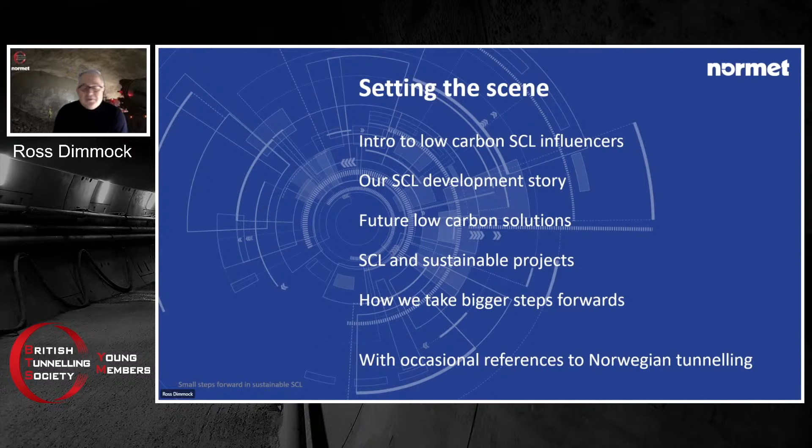So, what would be a presentation without the word COVID in it? I'm sure if you're anything like me, you're pretty sick and tired of these little plastic strips and sticking things up your nose and down your throat and squirting bits of fluid into tubes. It has been quite horrendous, I'd imagine, for everybody.

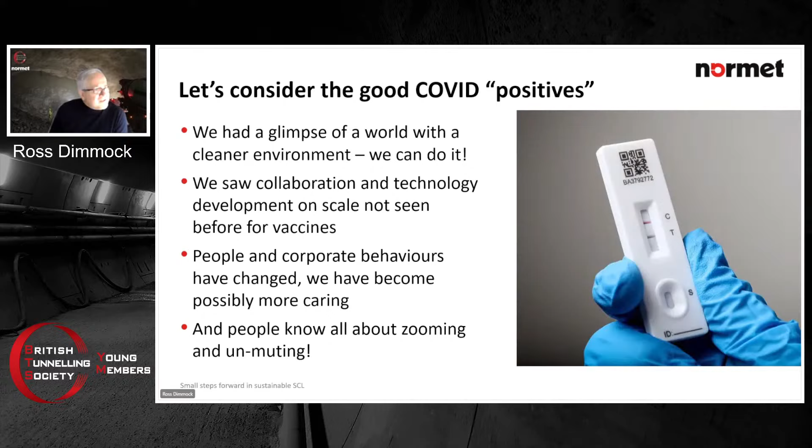But there are some good COVID positives, as I call them. During that lockdown, I think we had a glimpse of an environment that we found quite pleasing - very low traffic, very clear skies, and satellite images on the news of northern Italy looking smog-free, and in India. I think it was quite an eye-opener how quickly we felt the climate could get back to normal, or back to some kind of clean regime.

The other thing I think was interesting was the amount of collaboration and the human behaviors in collaboration to actually achieve a goal, on a massive scale, a real challenge to the industry, in the medical industry, to produce vaccines. It shows that things can really work globally and collaboratively on real issues.

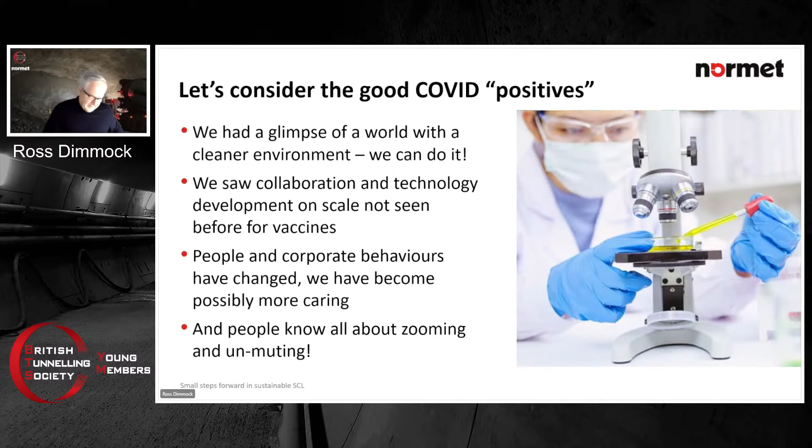I think the other thing was that our own corporate and personal behaviours may have changed. I don't know how it is in your organisations, but a caring side has sort of emerged, and certainly in the last year, the discussions in Normet as an example of our industry have been about care, commitment, courage. It's been about really looking at sustainable topics, and we got involved with some consultants about looking at how we could do better, and they're saying this is a magnitude change from pre-COVID in the need to develop these sustainable approaches to our working lives.

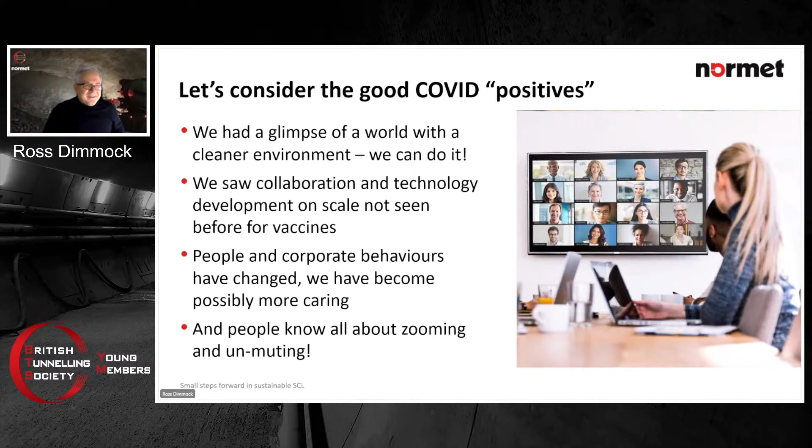Going right from a big high level view of sustainability and where we're going with this talk tonight, I really like this idea. We're hearing in the news this idea of the Paris Accord. What the goodness me is that? What has that got to do with shotcrete tunnelling in London or in the middle of the UK?

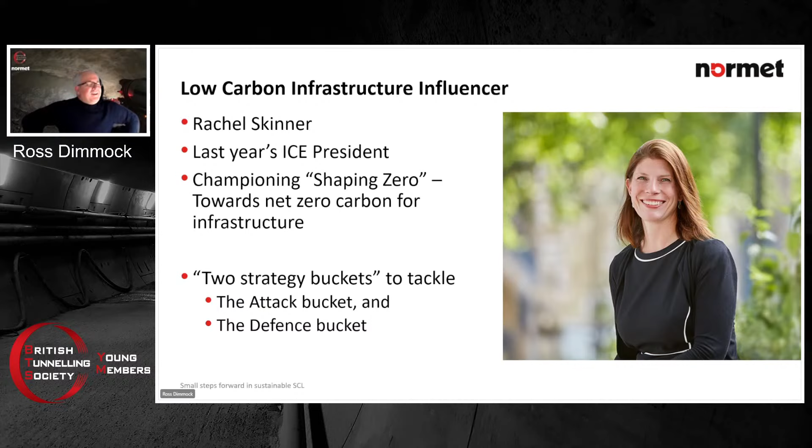And the defence bucket was a little bit more troublesome for me. I'm not going to go talking about it any more than this slide, because if you remember in 2021, in the middle of the summer, there was this massive rainfall, 270 millimeters of rain in a few days. And it flooded most of Europe, including London. A lot of the infrastructure, our tunneling infrastructure, things that we get passionate about, we were a bit dismayed to see these images.

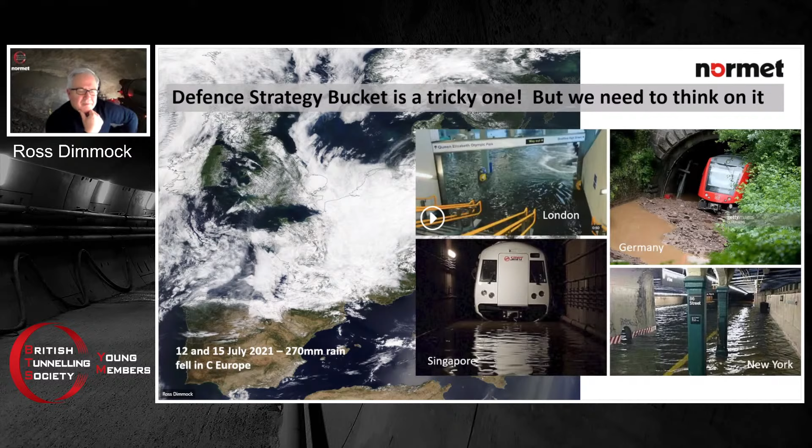And it's not just Europe. There's Singapore, New York, Germany, London, Czechoslovakia, Poland, all had massive flooding issues in their tunneling infrastructure. Rachel Skinner's view was, we need to think about that when the attack strategy hasn't maybe quite done it. We need to consider climate change on tunnels and in new tunnel design, but also in the existing infrastructures we have. What can we do to protect them in the future? I don't have an answer. It left me a bit flummoxed, but it is one of those topics that we need to think about going forwards.

My other influencer, and I have to recommend this chap to you, is Lewis Barlow. He works for Sweco, a designer based in Glasgow, but he's also representing low carbon infrastructure for the Scottish government, the Welsh government, I think the Irish government, and I think he's been doing some work for England. He's also the ICE tutor for carbon management in infrastructure, and I recommend everyone go on that course. It is absolutely superb, and really opens your mind to the ideas of where we're going with carbon.

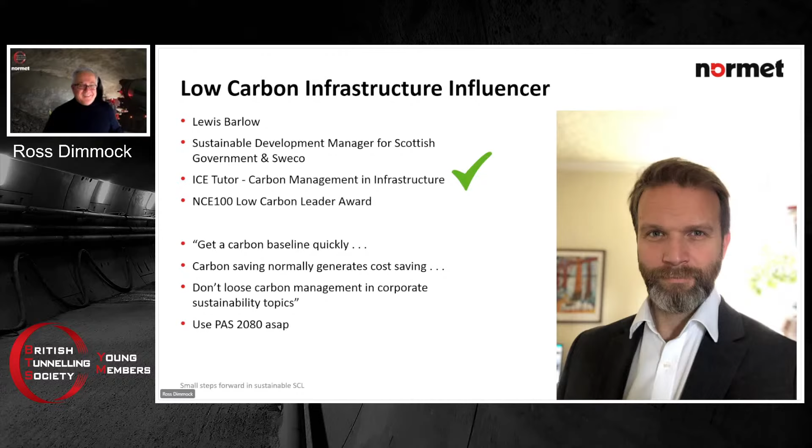My other pin-ups, all right, I was going to call them pin-ups, but I call them heroes. There are a lot, and these are just 3 I could think of in particular related to sustainable SCL.

Of course, Tom Melbye. I don't know how many of you know him, but in our industry and globally, he's extremely well known. I've probably known Tom for 25 years. A lot of the spraying technologies, the Supremas, the Meyco equipment you see around, and the Normet kit you see around, and all the spray membranes and microsilicas in concretes and fibers all come really from, in a way, this guy. I mean, he's brought a lot of this technology to the industry. And even now, he's refused to even go in cars and trains.

He's actually skiing everywhere and saving energy. No, that's not true. And electric bikes as well and things like that. But he remains quite an inspiration in how we develop our industry.

And I think the other one is Keith Bowers, and the Harding lecture a few years ago was actually very stimulating. I know Keith from a long time ago, since TRL days. And I know that the projects he's working on now are addressing these things very seriously and really moving in a good direction, even to the point of producing their own energy to drive equipment on site using electrolysis of seawater to make hydrogen. So really inspirational characters that we need in our industry.

So a long time ago, in fact 34 years ago, I realized that cement wasn't concrete. I used to say, why are they spraying cement on the walls? And I was told, no, it's concrete. But for me, it wasn't actually concrete. When I look back, it was some kind of papier mâché that we used to spray on the wall through the dry spray process.

We used to spray around 2 cubic meters an hour, and we'd start spraying a heading in the morning, and it'd probably be finished by the evening, and then you'd wade up to the face in gravel in your welly boots. So you can see my welly boots there. I was the thin, slim, athletic-looking one on the left. But we used to fill our boots up with gravel, not deliberately. They would just flow in.

Baggings would burst, and I remember taking guys out of the tunnel with all the aggregates peppering their skin - awful times, and the toxic atmosphere, and girders and mesh, and being lifted up to the roof in an excavator bucket was pretty normal. In those days this was all pretty understood and clear, but I look back and think, my goodness me, this wasn't that safe, and it wasn't a very good process.

We would rarely get above 18 MPa at 28 days shotcrete strengths, and my goodness me, we get there in about 10, 11 hours now. So things have really changed, and no exclusion zones or anything like that. But actually, we were building massive structures, probably the biggest at 40 meters below the seabed, with 21 meter spans, 15 to 16 meters high, and 180 to 200 meters long.

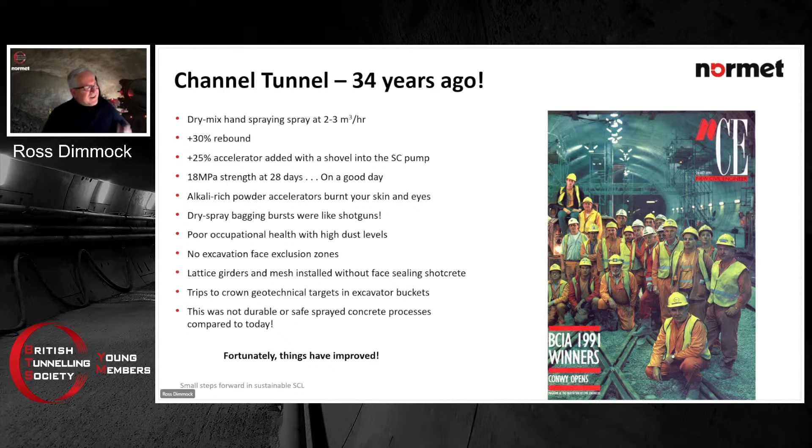These were big structures, and God bless some of those people on that photo who've left us. Award-winning stuff, not to be ashamed of, but definitely the spray concrete was terrible. Then the Jubilee Line, Heathrow Express, Channel Tunnel Rail Links - wet mix came, not dry mix, with low dust and low rebound. Still temporary linings, permanent spray concrete secondary linings, and guys were still strapped on baskets on the front of road headers and things like that.

My goodness me, we'd have a field day in the current world. But actually, the robots came quite quickly, the robot spraying, and men were left to hold switches rather than nozzles in the end.

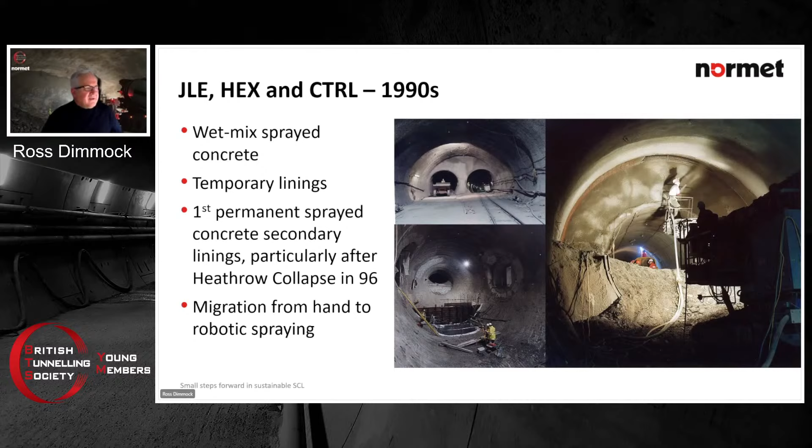Hindhead - permanent primary lining, spray membranes. My goodness me, how brave the highways were to have sprayed roofs as a finished surface, painted black, and to be honest, it looks good. Nothing new globally, but very new for the UK. It was a really nice project.

Lots of technologies really established themselves that we see today, and that was quite some time ago now, if we think about it.

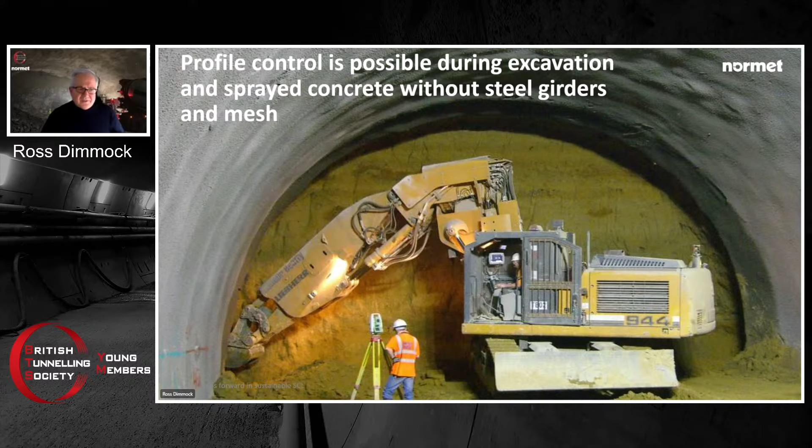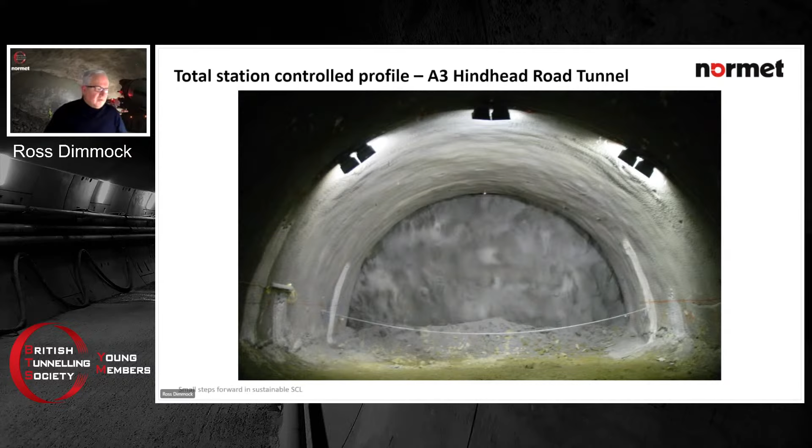These linings, without all the steel, are good durably. But then we were using optical methods to control the profile rather than lattice girders. You can see that red line was pretty much on track, but the yellow line, the excavation line, not so good - and that's really a product of the soil.

But I would say it's pretty much similar on a lot of projects, where we tend to over excavate. We always need to over excavate to get the minimum thickness, but I think we're using 1.5 to 2 times the design amount of shotcrete every time. Now that can't be sustainable, and we need to get a grip of that.

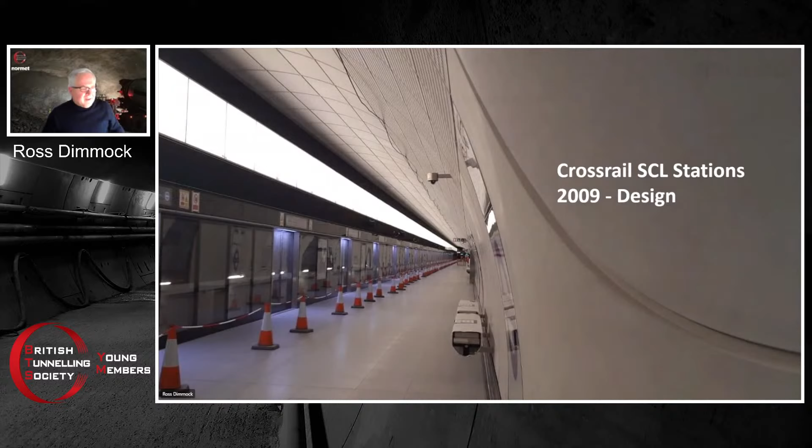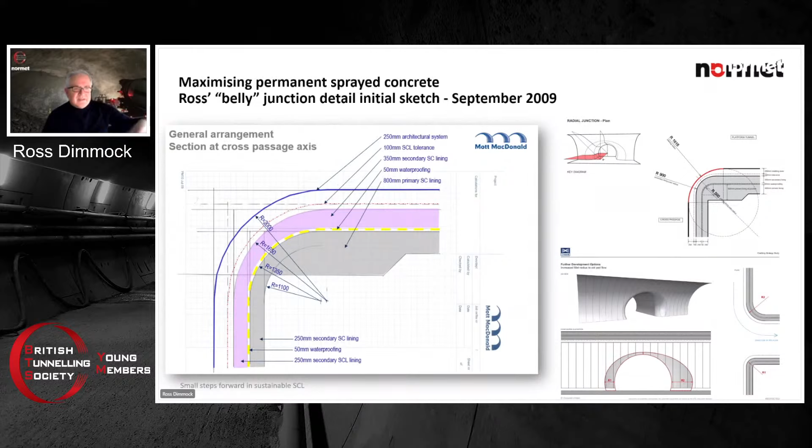And then Crossrail - this is where I got really back into design, and right from the beginning I really enjoyed the idea with the architects of creating these freeform designs, these curves, and we ended up calling them Ross's belly curves - I don't know why, big fat curves like that. These were the sketches that I originally remember doing, and how they got transformed into architectural drawings and 3D walkthroughs, and eventually into construction.

I think you'd agree, they look great.

Concrete, off-site, on-site, batching, and recently, of course, these dry silo systems, which are sort of like instant coffee in a big vessel - you add water and you get perfect sprayed concrete out every time. I know it's not quite like that, but in principle it's pretty good. And interestingly, this is creating interest globally as well, on other urban areas, based on the success we've had in the UK, in London in particular.

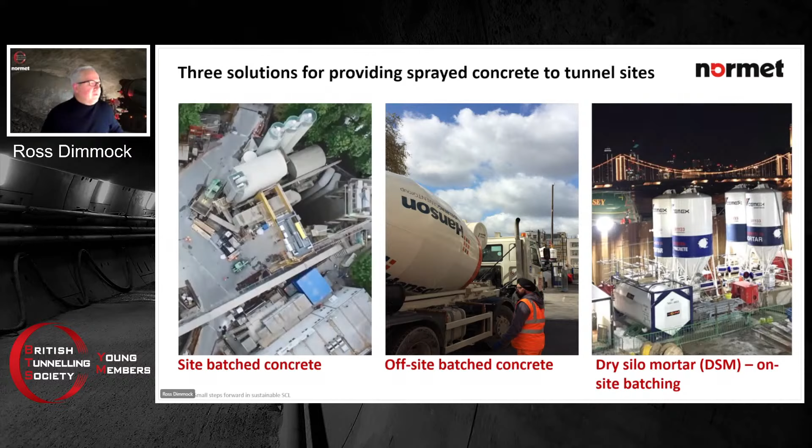So moving quickly forward then, Northern Line profile controls again. I've shown these pictures internationally, and people cannot believe there's no profile in there, no physical profiles. They can't believe that we can achieve such geometry control without any physical forms, but we can, and we do.

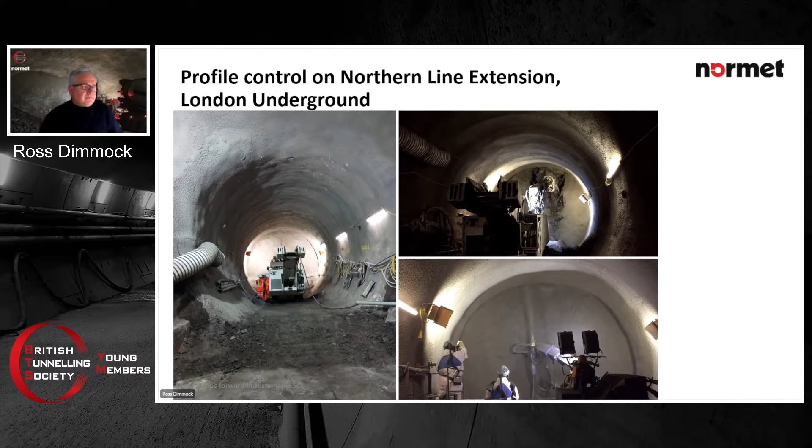Okay, the UK - I don't think people realise how well the UK is seen as an expert in sprayed concrete, both in design and construction, and that is exported globally on many projects. We are a centre of excellence in sprayed concrete.

We have optimised permanent sprayed concrete linings. We've used a lot of spray membranes. I know they've got that Marmite effect - people love them or hate them, but it is done, and we are doing more and more of these projects globally. Through the optical measurements, the optical total station, profile controls, extra mechanisation, and the use of structural fibres in the concrete, we've got rid of girders and meshes that needed to be installed in the face. And we've enhanced the durability of the linings as well. So we really got something really quite fantastic that we're doing.

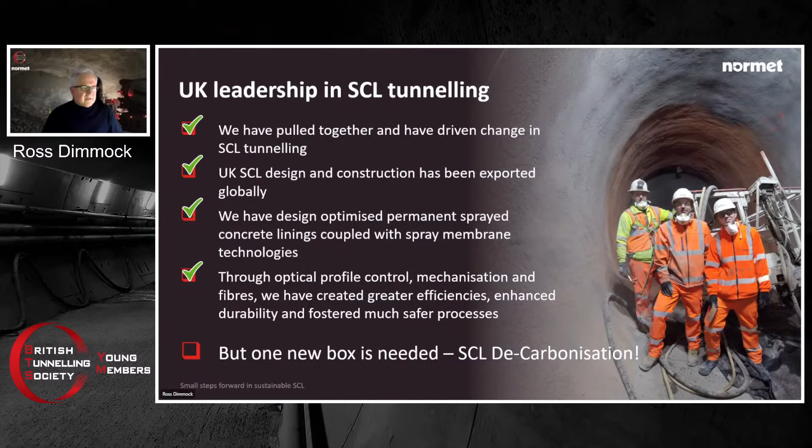So our politicians, I'm not going to give any names because they might not be there. But if we're going to try and solve this carbon thing, what do we need to do?

So we've got high levels of cement. We haven't got as many lattice girders and meshes as I had explained, but there are still a lot of that around. We always put more thickness on than we need to, because we've still got rebound, even though it's low, we still have it. We've got dust and rebound, unused concrete, multiple layers in our linings, and that actually adds thickness because of tolerances and complexity and risk - and all that equals carbon. So we've got to simplify what we're doing.

And we've got a lot of diesel-powered construction equipment. It's good that actually most of the sprayers that we use are diesel and electric because they spray under electric. But generally, we've got a diesel equipment business going on here, still.

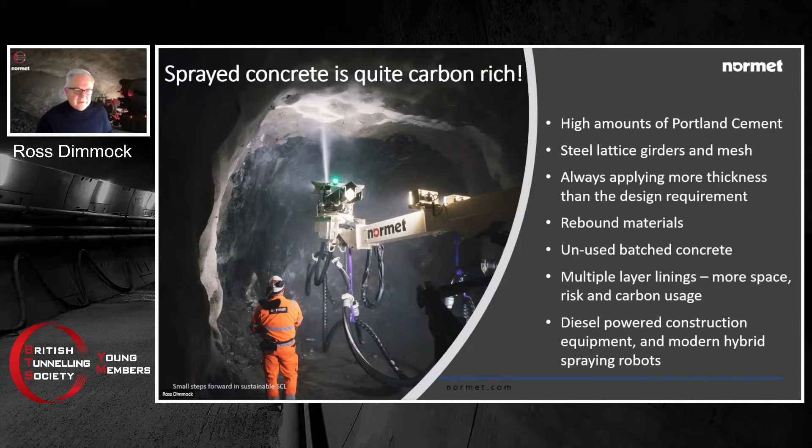So we go across and have a look at what Norway are up to. This is an interesting project, actually under construction now. It's quite many kilometres of roadway, but there's about 30 kilometres of tunnelling. It's called the ferry-free road. As it's called in Norway, it's really to connect communities, right, and stop people having to use ferries, creating this sustainable societal benefit of actually connecting people.

So it's not about dropping the carbon down - it's really about community connections and helping people locally. What you can see here is this typical approach in Norway where they actually do a rock support, very thin, based on the rock conditions, with rock bolts and pre-grouting. But they also then do these sprayed canopies, and I'll show you that.

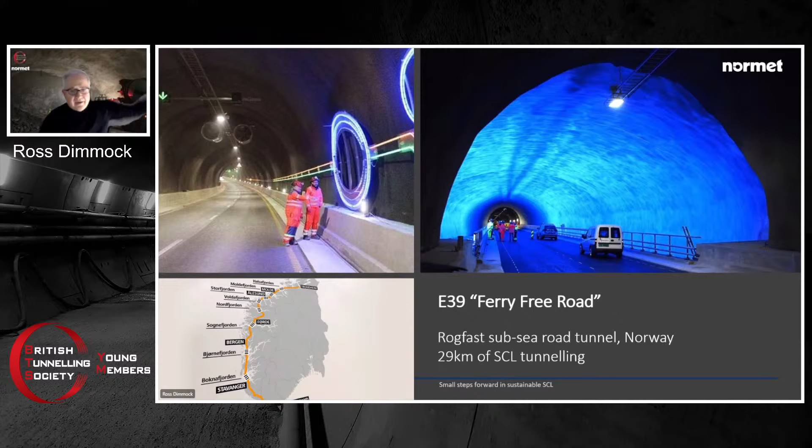This is a full sprayed canopy inside that rock support, and there's a gap actually between that and the rock reinforcement. So here you see it - this is the rock support behind, and all these bolts are actually to hold an internal canopy inside the tunnel. This orangey white material is a PE foam, an insulating foam, to actually stop groundwater that comes into the Norwegian tunnels from freezing and leaving ice on the road or freezing up things. It's quite an amazing technique and very, very popular throughout Norway.

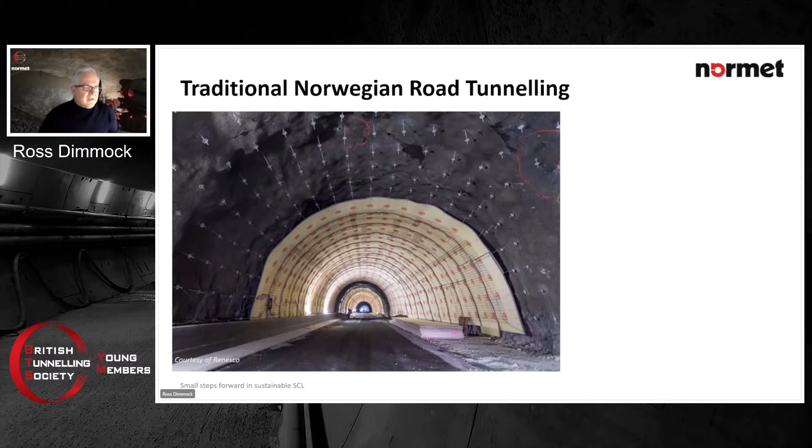And here you see another one. On the side, for road tunnels, you have these precast panels, a bit like the Hindhead approach, where you've got the high clean surface finishes on the sidewalls and then the sprayed roof around the top. They just assemble these precast panels all the way down the tunnel and then spray the roof, normally with fibre reinforced shotcrete, as you can see here.

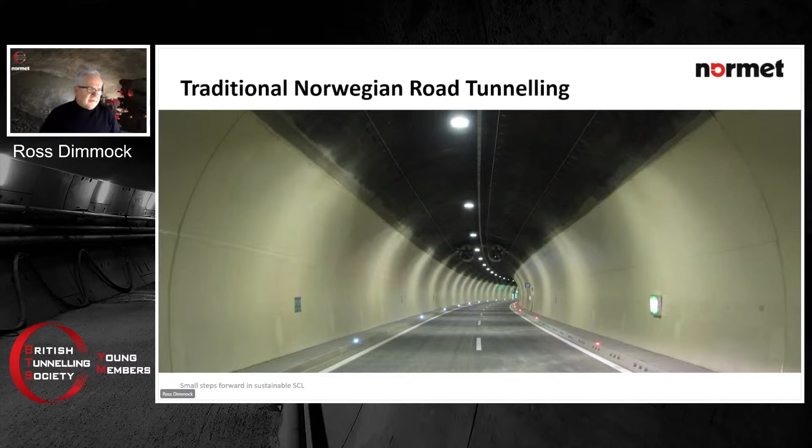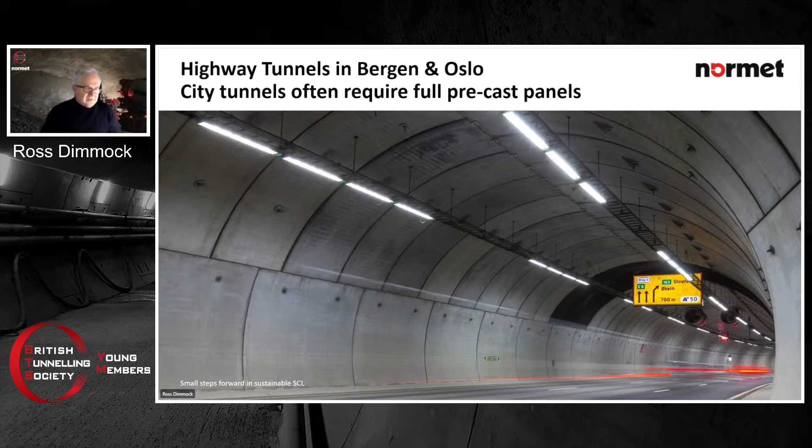To end up with these sort of high finishes on the sides of the road tunnels and spray concrete crowns over the top. In very densely populated areas or high traffic tunnels, like in Oslo or in Bergen, they actually take those precast units right over the top, so there's actually no sprayed lining. That's what I would call traditional Norwegian tunneling, and you can see another example, I think this was in Oslo, of these precast internal units.

Now they've had some developments. They're looking, like the UK, at ways we can do things better. It's interesting that most of the highway agencies, of which there are two, are going back to have a look at cast in situ secondary linings with sheet membranes. So they're having a little dabble in that, and the rail authorities are having a look at much thinner linings with permanent spray concrete and spray membranes. So it's quite an interesting division of technologies going on between the road authorities and the rail authorities.

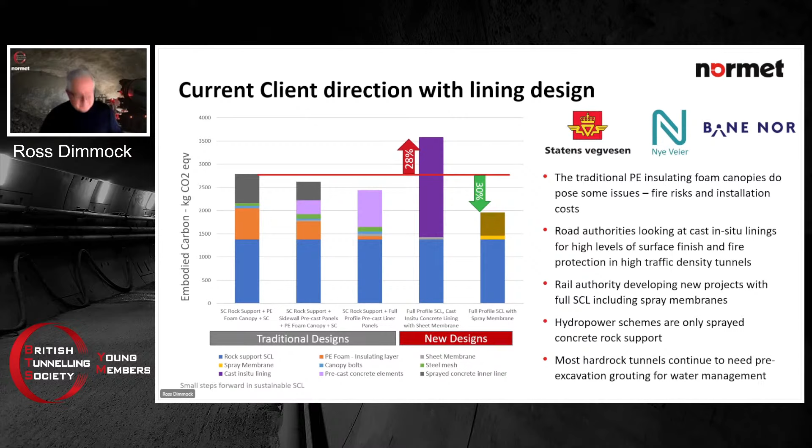So reducing carbon - I've looked at, I think this is where Alan really opened my eyes, in his paper about breaking things down into equipment, materials, design, and even operation maintenance. I hope he doesn't go crazy, because I kind of summarized his points - equipment can save around 15% carbon, and materials and design combined can save around 20%.

Now this paper was a couple of years ago, and we are looking at this through Norway, through what we're doing in Normet, and actually it's not far off. If we do all the things that you'll see soon, we are around between 35 and 40% carbon reduction straight away, with things that we could do today. So we can do quite a lot - we can make big steps.

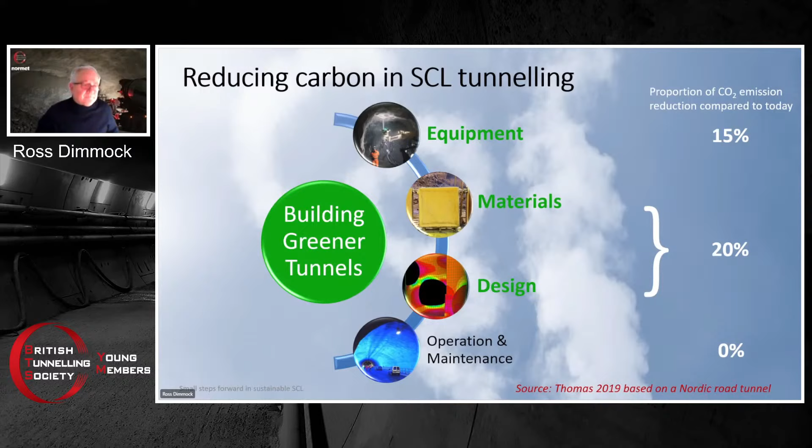On the equipment side, these are just ideas now, they're not set in stone, just thoughts that could be considered. We believe that training of people building tunnels is really important, particularly spray concrete tunnels, so the simulator work that we're developing with Serer, with our own team, is really important.

We can actually fast track appraisal and training of nozzle men now, much quicker than perhaps the old routes and the old EFNARC routes. I think it's really important that we get people quite familiar with dexterity and the way they approach, with these virtual reality headsets on, and that it is pretty close to reality as it gets. So, great tools.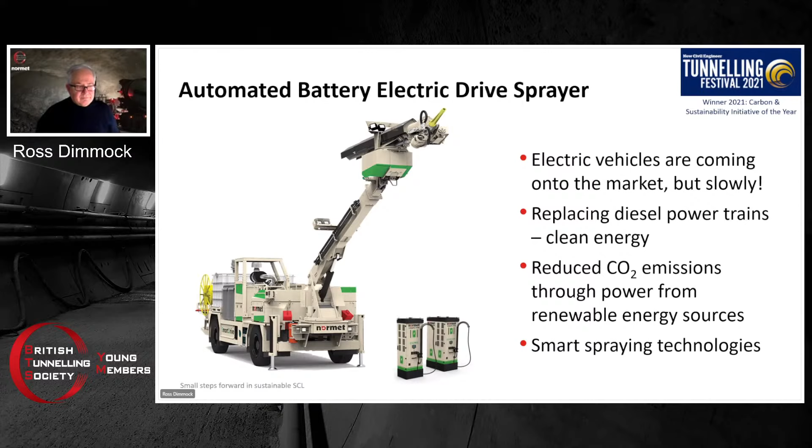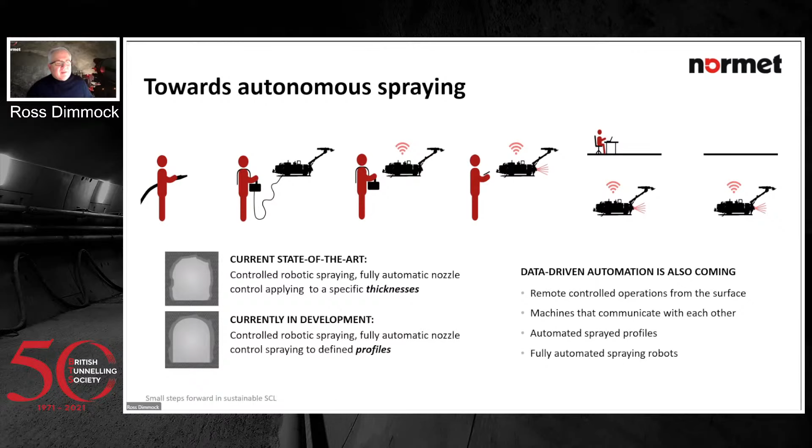Not bad. And where we're going with that technology in the future, we want to start to look to see if we can spray tunnels to profile more automatically rather than just thickness, to support the nozzle men in controlling the machines and controlling the spraying patterns and bring efficiencies. Possibly, who knows, in the future with digitalization and good strong Wi-Fi signals down the tunnel, we may even be able to spray without nozzle men. But let's see how that develops.

I think this is a really important point to bring up: culture differences and behaviours in countries. I like this distinction between Norway and UK. They're quite similar northern European countries, similar in outlook and the ways they believe in their politics and everything. But there's quite a huge difference in the way technology is adopted.

I think the big thing to realise is that Norway has got 98% green energy. They are the green battery of Europe. They've got free energy oozing out of every part of their country, and 90% of it is hydropower, because they're blessed with glaciated valleys, hanging water aquifers and lakes in the mountains, and of course the fjords by the sea.

Huge incentives for people to go electric, and with their domestic car market, 70% of all cars in Norway are electric, can you believe that? Amazing. And they've stated there will be no fossil fuel cars by 2025, in 3 years' time. Can you believe it? New incentives through government grants for the construction industry to go green, to go electric. 7 cities are designated as carbon neutral by 2025, so all their constructions will be carbon neutral. Is that where we are in the UK?

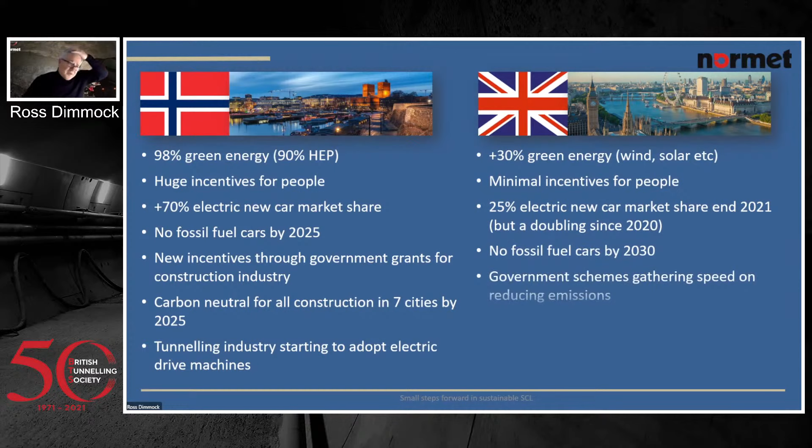In the UK we're not that bad. 30% green energy is stated, but there was a day last year where we got to 58% green energy. So good, we can do it. There's an increasing amount of wind and solar power coming on. We have minimal incentives for people - I think the best you can get with an electric car is a free charger put in at home, and that's it. Having said that, 25% electric car market at the end of 2021, which was a doubling from 2020.

I can't see any adverts on TV for diesel vehicles anymore. No fossil fuel cars by 2030. Government schemes - I'm being really optimistic here saying government schemes are gathering speed on reducing emissions. If we asked ourselves honestly, are we onto something here? But I don't see it too often in the projects we're involved in. A few tunnel projects in the UK are trialing some low carbon concrete mixes, but mostly for pile walls or diaphragm walls, things where gravity is okay, nothing overhead. And very little talk of anything to do with electric equipment.

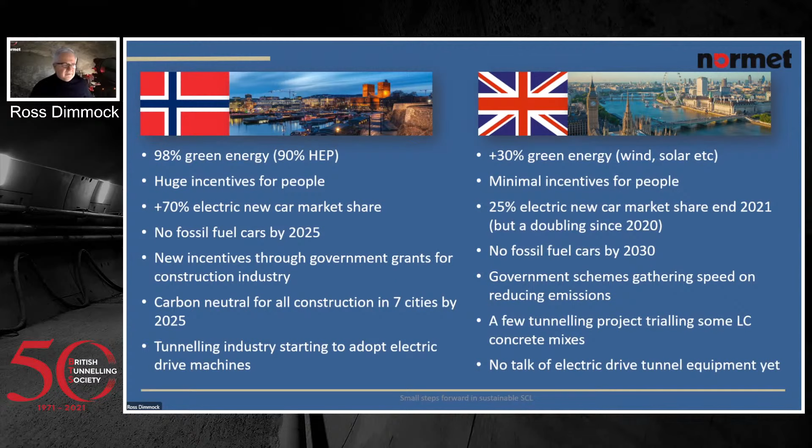So a whole suite of equipment - I thought it would be quite interesting to show you this. This is where we are today: we have a grid of fossil fuel energy coming to our sites, we put diesel in our vehicles. That's 100% carbon.

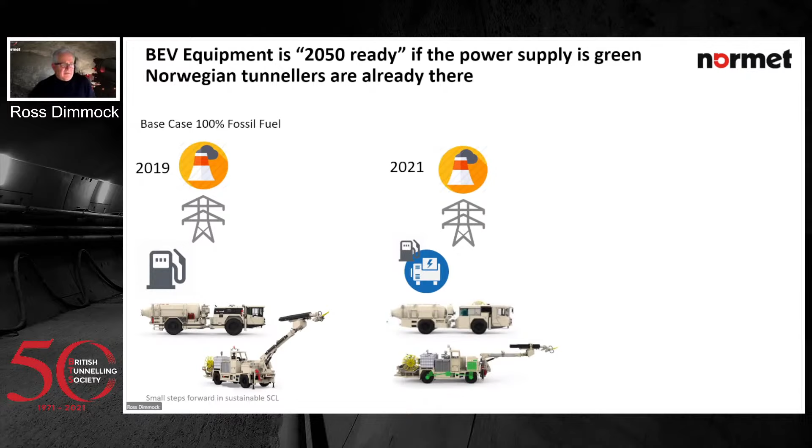We also are now trying to put electric vehicles on sites that are run off the grid with fossil fuels, like the UK, like India, like everywhere else. And it's a saving, probably about 20-30% saving on those electric vehicles, on their carbon footprint. But if you're like Norway, where you've got 93% or more renewable, your grid is green, and you use green electric equipment, you are basically at the Paris Accord. You are 2050 ready, right? You are using green energy on green electric machines.

So it's a choice that clients have. Do they want fossil fuel supplied energy, or do they want green energy to their projects? Where are they buying their power from? If they use electric equipment, they are 2050 approved. They're ready, they've done it, they're zero. So it's great. We're there today.

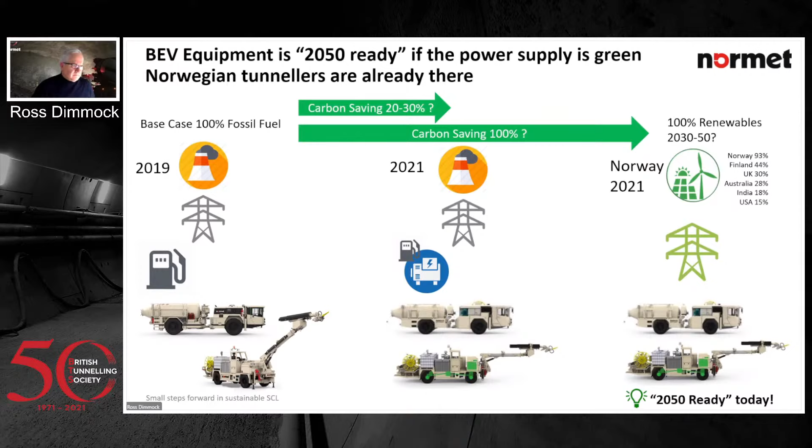This can be done on the machines now, and quite fast. We want to be able, the nozzle men, to make the decisions underground at the point of spraying, not to have the survey data taken out for the daily review meeting and go, oh, we've sprayed too little, oh, we've sprayed too much. We need to be able to do it there and then. So the nozzleman goes, okay, I just need to put a bit more on, and it's done. So getting it right first time.

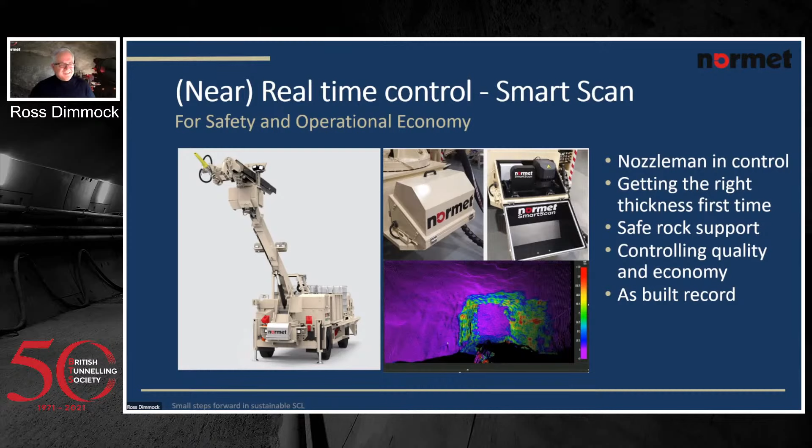And these scans, we're not real time yet. We can scan the profile in about 1 or 2 minutes and get an answer. So it's not brilliant, but you got a result in 2 minutes on the screen of the machine, underground, there and then, as you can see in the bottom right. But what we'd like to do is take this further and start looking at profile control with the scanners, looking at better assessments of the materials used, creating a baseline of where we are, giving real-time feedback to the nozzleman rather than every 2 minutes.

3D coordinated data, so we need to georeference these things, geotechnical assessments, no more geologists in lifting baskets going up. We can get photogrammetry and overlay it with scans. And then we can feed all this back to BIM modeling and digital twins. So this is where we're working. This is a serious part of our development at the moment.

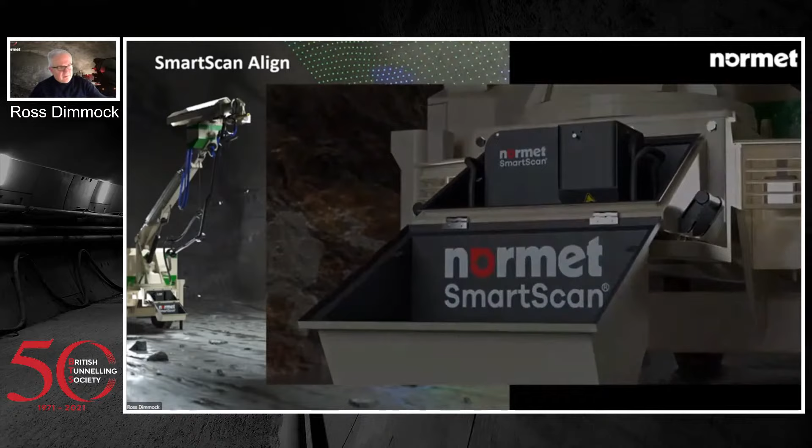And we've created a new version. This is called SmartScan Align. It picks up on targets, georeference targets. The scanner opens up, scans the tunnel profile where you're about to spray, and you get the base scan, if you like.

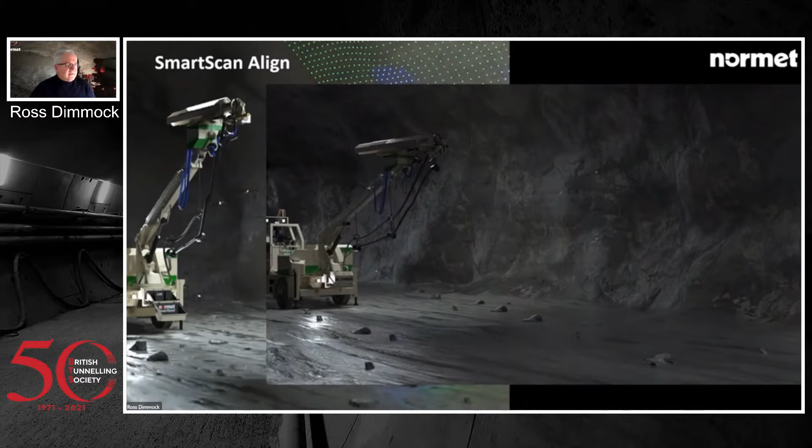Then this is very fast in the animated world. We spray our tunnel linings. Okay, that's the whole lining sprayed, guys. And then we scan again. The nozzleman can see immediately where he needs to spray or whether he sprayed enough or whatever. And then he might spray a bit more and do a final scan. And all this information then, georeferenced, can go back into the model, into the BIM model or into reporting, and it's an open language that can go into any other survey packages.

So this is really important. It creates our baseline, our digitalization of where we are, and the view is that we should be able to reduce the amount of concrete we use. Be more efficient. That's what we're trying to get to.

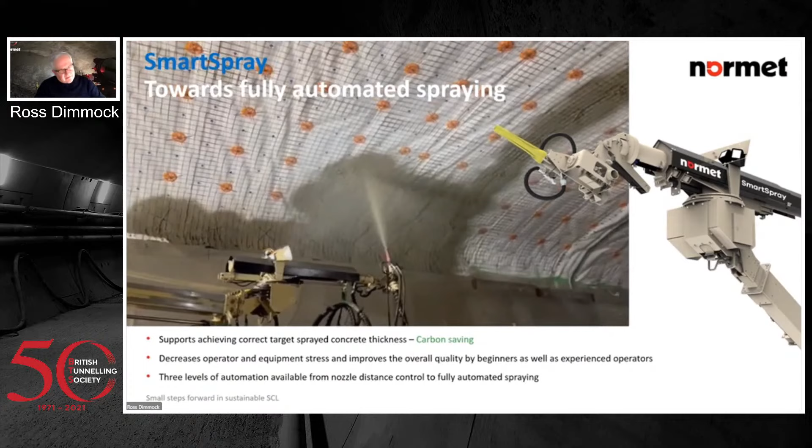And there are other tools. I won't go into too much detail, but there are other tools like computer-controlled or aided spraying, so that the machine is taking over a bit of the working out, or that the nozzleman is trying to spray at the right angles, the right distances, in a more set pattern. And all these things further support carbon saving and efficiencies.

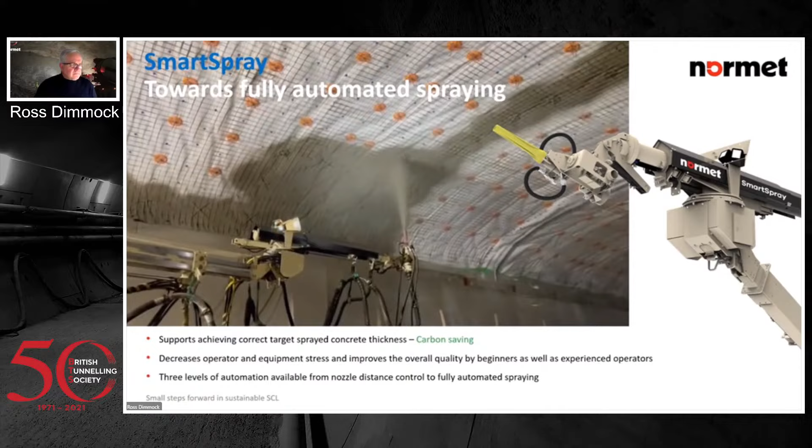Materials. Okay, I'll just take a quick drink.

Everybody's focused on sprayed concrete with the amount of cement in it. I think what I'm trying to get across is there's quite a few things we need to look at, but cement certainly is a problem.

CEM1, we love CEM1 in our tunneling world because it reacts with our accelerators, and it's really important that they do react, because we're spraying tons of material overhead and it's got to gather strength within 10, 15 minutes for us to work safely. So unlike putting low carbon concrete in the ground, spraying low carbon concrete overhead is another challenge, and we really need to be aware of the performance.

On that pie chart, that's a cubic meter of sprayed concrete. You can see that 77% of the carbon lies in cement. But there's also other big players like fibers and some of the admixtures. The big one, if we're going to do anything, it really is the cement that we need to focus on.

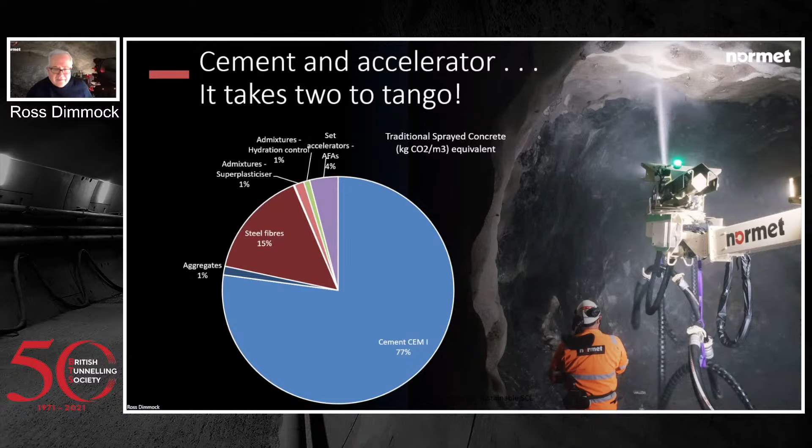Whatever we do, it has to enter that concrete stream continuously. If it doesn't enter continuously, it can cause real problems on the layering approach and safety of that material. It has to react with the cementitious binders, or react in other ways with other minerals. And it's got to be safe for the operative. We don't want more dust, we don't want any more toxicity like we had back in the Channel Tunnel days. And it's got to be safe for the structure. So we've got a lot of demands on getting this mixture right.

When we look at cements, there's a whole range of them. The EN197, which is pretty much an international standard, covers the CEM1s, CEM2s and 3s. They all contain Portland cement, and it's about 100% Portland cement at the top, which is CEM1. As you go down that list, the amount of Portland cement in these blends reduces, and generally speaking, as you go down with less Portland cement, it becomes a greener cement, or eco cement, as they're called.

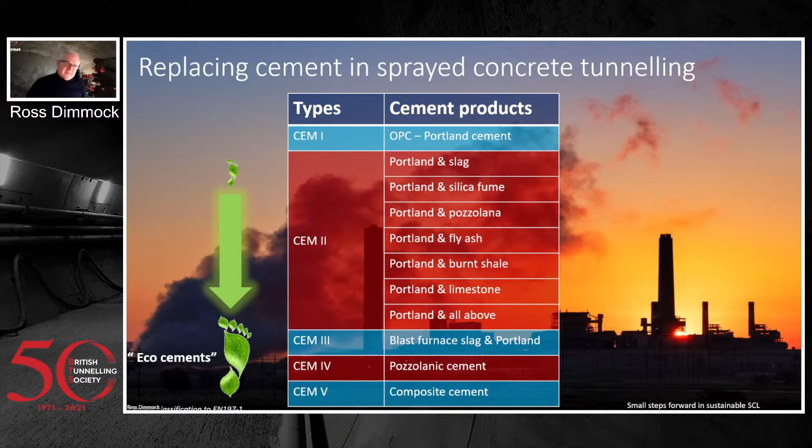But what it means for us in the sprayed concrete world is, generally speaking, those cements are less performing when it comes to early age strength. They can be higher performing in long-term situations in terms of durability, pozzolanic behaviors and the like, but it's those first 5, 10, 15, 20-hour strengths that we really need in sprayed concrete for safety and for building thick linings.

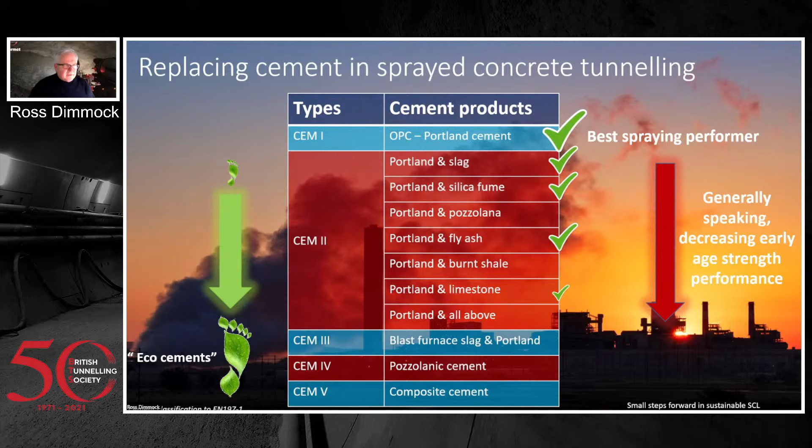At Normet, we've had quite a lot of good experience with CEM1, but even in the CEM2s, which are these sort of blends, we've got quite good experience. Actually, they can work. In fact, a lot of countries now are using more blends than pure CEM1. To get CEM1 in some countries is just impossible, so we've been forced to look at these blended cements.

One interesting project was Hinkley, where we had robots and mixes for a massive earth retaining structure for the reactors, 35-meter high walls - really interesting project. We were asked to look at three mixes at the beginning, and one was based on GGBS without microsilica and all those other things. We did a lot of lab work and trials and it was perfectly great, but they didn't choose that in the end - they just went with the normal standard microsilica pure Portland cement mix. If we'd been where we are today, I think that decision would have been very different.

But actually, I'm just showing you there, today we can cut carbon. This is the first time I'd ever calculated the amount of carbon in the concrete mix before - until a few months ago I didn't have a clue. If someone said, how many kgs of carbon do you have in a concrete mix, I wouldn't have had a clue. But I know now it's 550, 570 kgs of carbon. And I know that if I put 25% GGBS in, I can cut that by 40, 50% down to 300. So today, without any technology changes, we can cut carbon in our concrete by 40, 50% for tunneling.

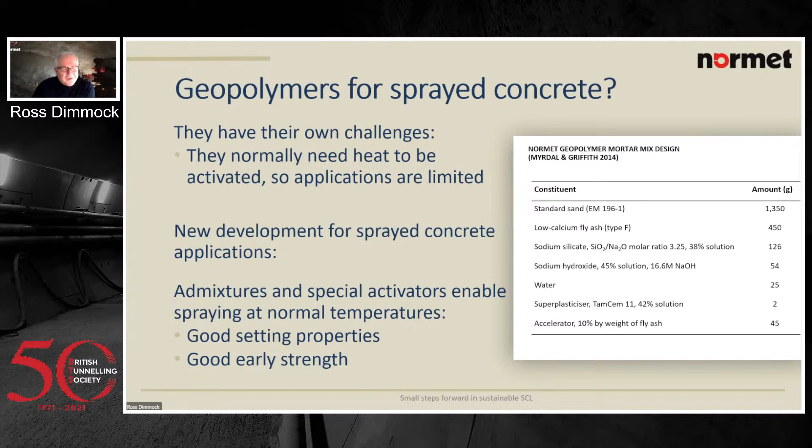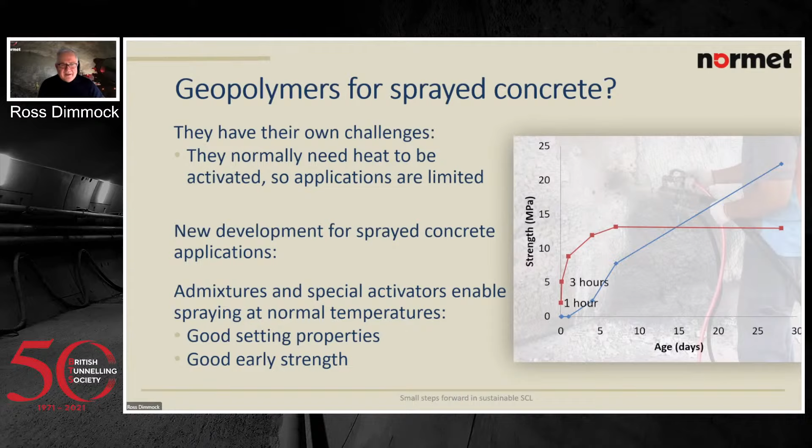I know Charles Allen is itching to help me look at this, and I have an issue, but we've made this work to some extent. This is cement-free spray concrete. We sprayed it and got superb early strengths - 5 MPa in 3 hours, which is great and super safe for the tunnelers. But it sort of stops after 6 or 7 days and goes flat, staying at 13 MPa roughly. I think there are ways we can push up that strength to 20, 30 MPa. According to my designer friends, that's no problem as long as they know what they've got - they can design linings on it. It's interesting, we could really drop the cement down to zero if that's what we need to do.

So moving on quickly, we've got this durable spray concrete, performing equipment and materials, well-trained people now with simulators and support, and quite good knowledge on design with permanent spray concretes, spray membranes, and detailing. We've got a lot of calibrated models now, particularly for London. Where do we go with design? And of course these spray membranes could be quite integral to that.

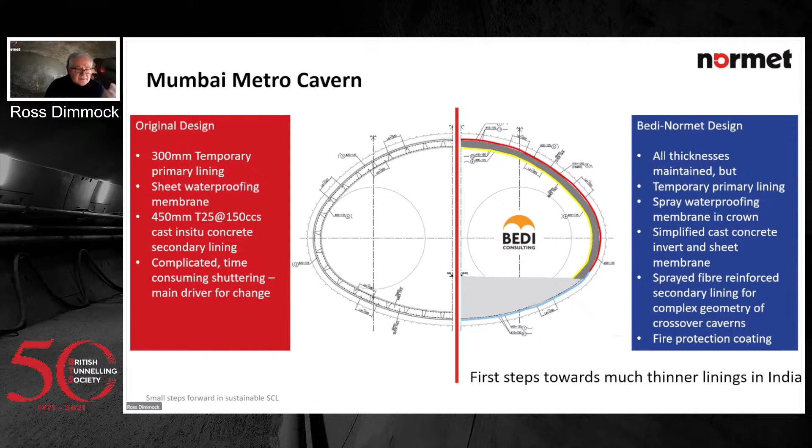It's just about finished - these are the membranes going on and the secondary sprayed linings. This is pretty typical. We've seen that in Singapore, and this is going on almost daily now in Australia. So just to give you a flavour, this is not just something we did on Crossrail and Hindhead, but it's actually happening globally, even in Norway now.

So we did a quick exercise with Bedi Consulting - we went back to Crossrail and looked at the platform tunnels again with different lining configurations and materials. We looked at the original design, as you see on the bottom left, and in the middle an optimized design where we took out regulating layers and just put a membrane. So we're looking at a new kind of membrane we could use there to take out the complexity of all these different layers, trying to make it three.

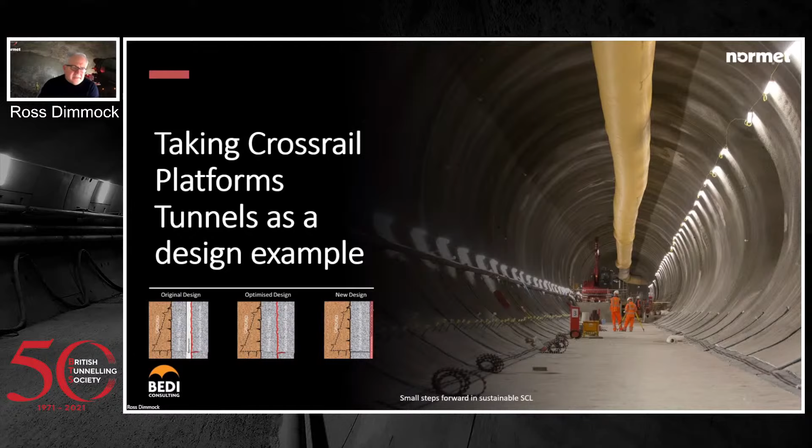Where we'd like to go is a much simpler spray concrete tunnel lining - one big structural waterproof lining with a waterproof catch-all umbrella membrane, or mortar, whatever you like to call it, on the inside. A bit like a segmental lining, if you like - joints, construction joints between each bay, but then a full continuous coating on the inside, flexible and waterproof, and maybe aesthetically pleasing for certain tunnels as well. So we're trying to simplify and sort things out.

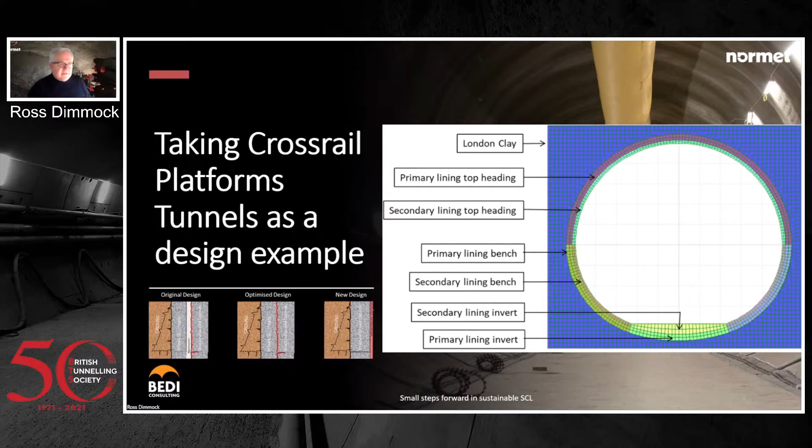So we used the same finite element model and looked at these three different linings, then came out with moment interaction diagrams on those three options. They all actually satisfy the design, even though they're much thinner than the original Crossrail design. There were constraints in Crossrail where the water was acting, but I think under new ways of thinking about lining design, we could make considerable savings compared to where we were 10 years ago with Crossrail.

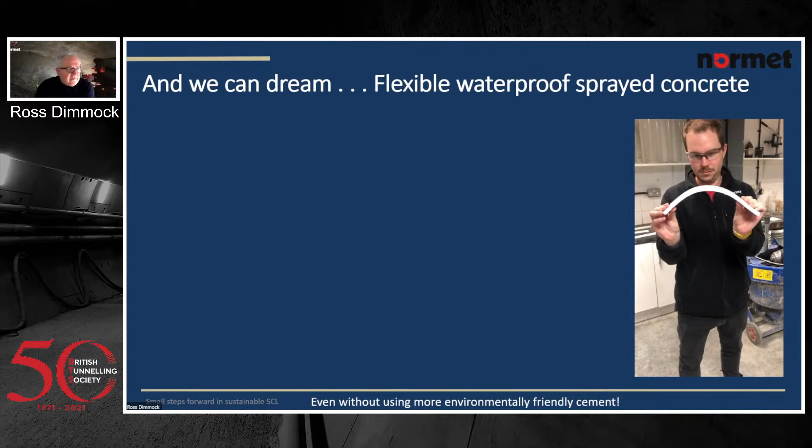So these are sort of the crazy stuff we're thinking about. This material that Ryan is holding is actually concrete - it's not breaking, it's actually flexible. There are some weird, wonderful things we can do with mortars and cement-based systems with certain polymer technologies. I don't think we need it to be this flexible - this was one of the prototypes. We don't want wobbly, bendy tunnels too much, but it's just to emphasize that you can get certain flexibilities with sprayed materials or cast materials like this.

On those options we looked at with Bedi Consulting, our initial studies looked at a sort of optimized design where we could get around 30% carbon saving. With this much simplified approach, we're almost halving the lining thickness and getting around 43% saving in carbon - and that's without even changing the cement type. If we were to change the cement as well, we could be over 50-60%. They're wild ideas, but that's what we're working on, and hopefully we can get that to work.

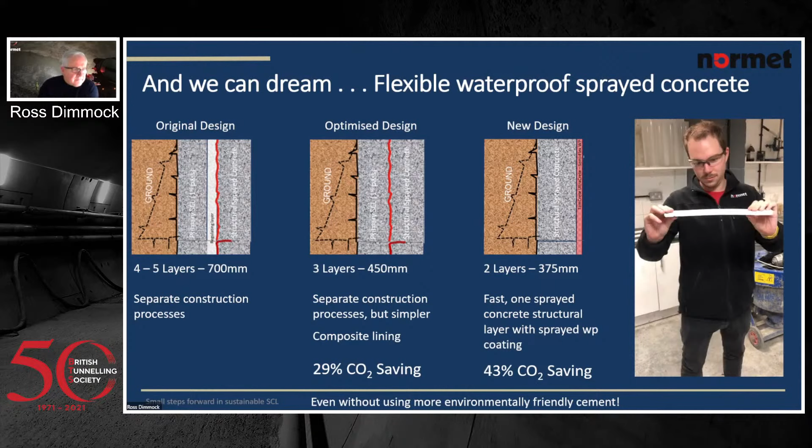So that coating and those new membranes are going through a process of approval internally. We set the performance criteria, we do the lab tests, we do spraying trials, and hopefully we find a nice client who would like to try it in a big tunnel somewhere.

And that's what I'm missing a little bit in our industry. From the days we were doing trials at Heathrow, at Jubilee Line and other places, we don't do that anymore at the moment. And I think it's time to really look at full-scale trials with new technologies again.

So these are the scale-up trials we do. This is in Derbyshire with Cemex, who we partner with on the dry silo mortar systems. So we're producing wet mix and spraying panels.

That is a normal guy, he's just on his knees, but it shows the kind of dedication we need in the industry to get on your knees and... I don't think he's praying. I think he's just looking to make sure the panels are sprayed really well.

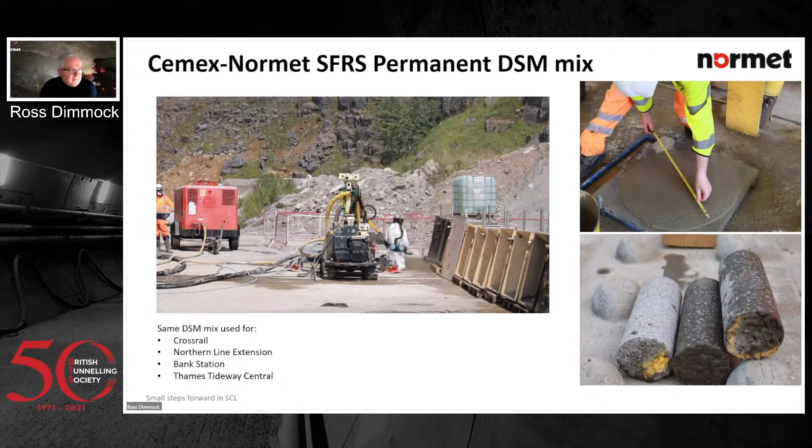So it's high flow concrete, it's permanent spray concrete with fibres. We then actually put water through those panels with pressure to simulate what is always the nightmare for spray membranes, with water ingress coming in.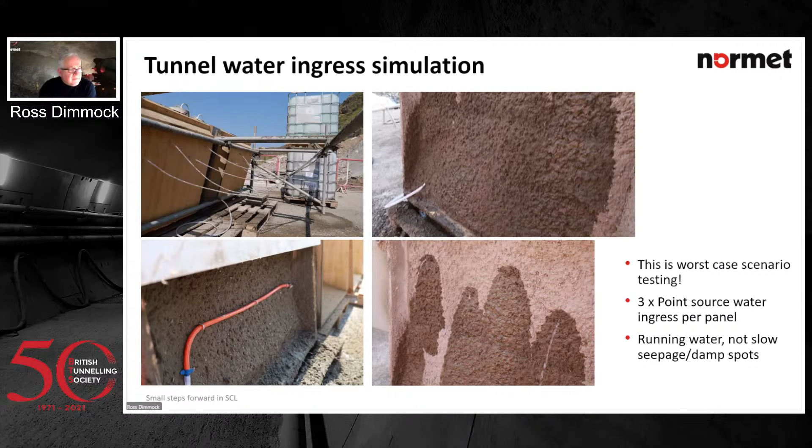We then spray the panels, and this is a new version. It's fast setting. You can actually spray over this in an hour. So it's immediately curing as well. It's quite a novel system.

There is one little bit of high pressure water coming, but all the membrane around there is fully cured. Unlike today, where they don't cure at all if you've got water ingress, and it can wash out all the polymers. But this is immediately curing, and this is very easily sealed then with injection. So a really nice step up from where we are.

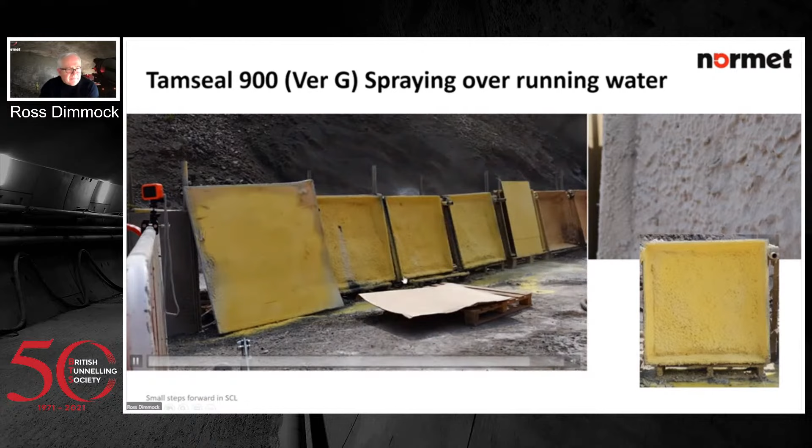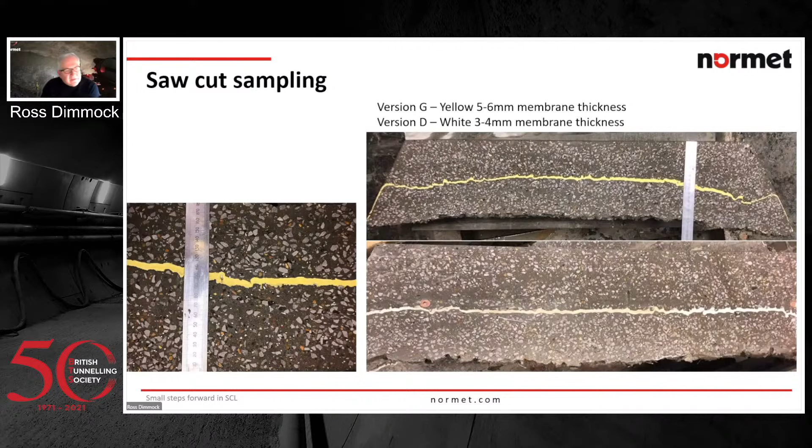We hope this will be quite an interesting thing for the future. And of course, we do all the sampling and testing and bonding and looking at the integrity of the membrane. This was the idea of coating a simply sprayed concrete lining with a membrane that covers everything, covers the fibers and all the irregularities of the substrate. And this potentially could be viable.

I mean, it's a really low cost tunnel lining solution, very low carbon. You're basically halving the lining thickness compared to Crossrail. Could be something for non-public tunnels to start with and see where we go. But we need to trial it on a big scale.

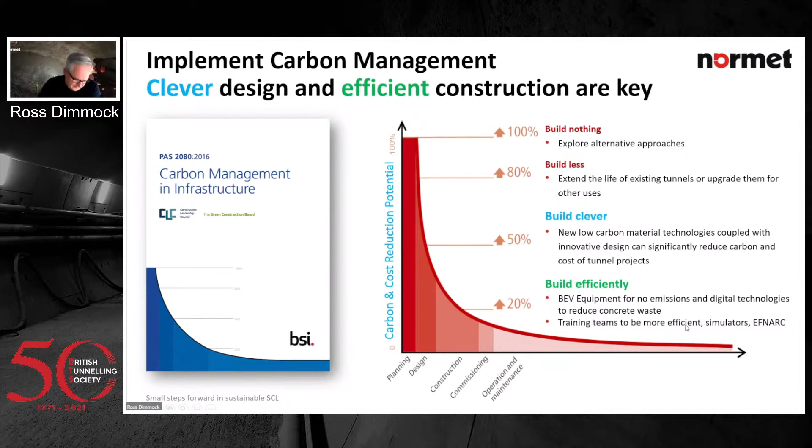So very quickly, we're looking at this now, and I think that's how the industry should see it - it's not just about low carbon concrete, it's also about looking at design, looking at construction. I haven't calculated all the numbers, and this is a kind of representation, but that's what we need to do. We need to start putting numbers on what we can do to lower carbon. I think we'd be pleasantly surprised at what we can do.

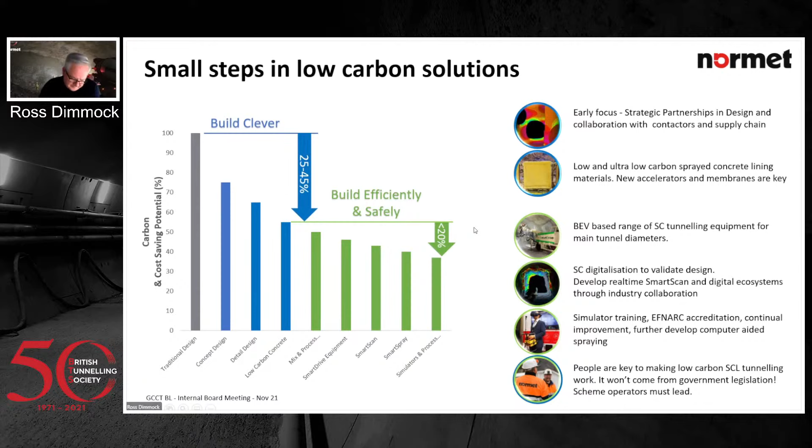Carbon is a tricky topic because the Treasury has the Green Book for all public projects, which was redone in 2020. This gives prospective projects a way of evaluating them in terms of costs and also carbon. The Department of Business, Energy and Industrial Strategy established values for carbon back in 2018, prior to COVID.

So we've got to wake up and think about what we're going to do about this. I'd like to be more positive and say that sprayed concrete tunneling brings broader sustainability benefits, through projects that really promote sustainability in the broader sense of the word.

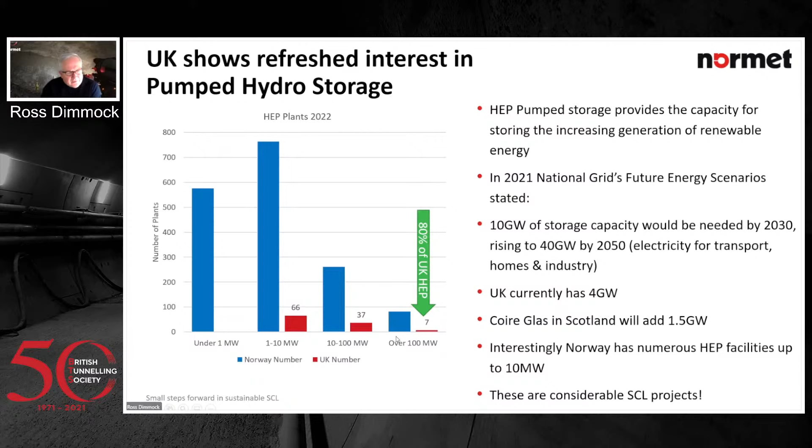We're currently at 4 gigawatts in the UK, and Coire Glas will add 1.5. By the time that's built, we'll still want to get to 10 gigawatts. So I think we've got quite a good business ahead of us building pump storage schemes. Norway is pretty good too, and not always pump storage - they have pure hydro schemes, which they're fortunate to have from their topography.

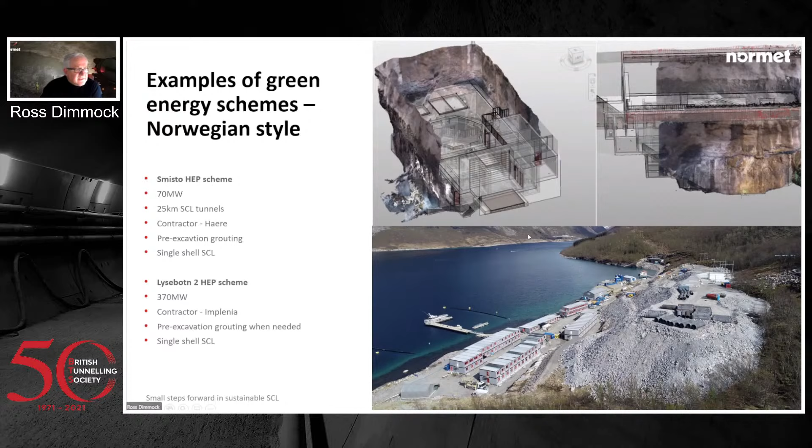This is the Smisto scheme being built, and Normet had all our spray machines in there doing sprayed concrete. There's another one with a drop of 600 to 700 meters from a lake at the top, producing huge amounts of power. All these projects involve pre-injection of the rock mass and single shell spray concrete lining. I think that's something the UK could consider in our new economy of green energy.

This is one of the powerhouses underground. I asked them to send me a picture of the real thing, and they said this is the real thing. I said that cannot be a real turbine hall. Yes, it is, they said. I said no, it's a graphic. No, it's the real thing. Can you believe it? It's fantastic.

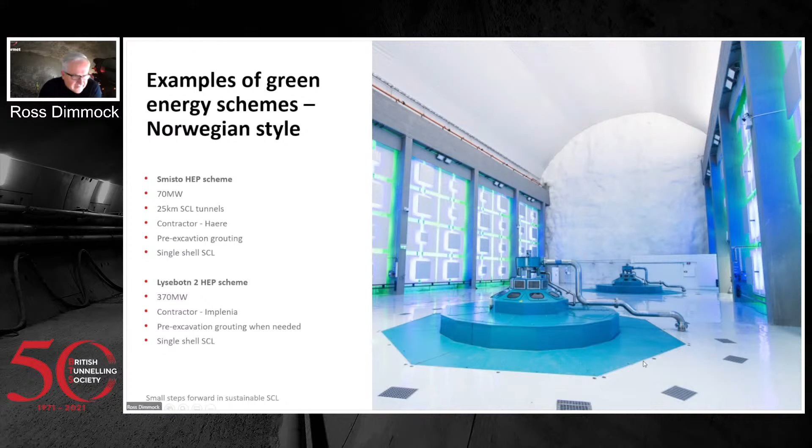The benefits of putting tunnels between the islands is supporting communities and stopping the migration of people away from the islands to the mainland, allowing them to live in these communities. It's also about safety, because the ferries and aircraft in and out of the islands can't fly or sail in bad weather. So you need fixed links if you want safe communications.

And actually, there are economies, and the balance sheet works long term in favor of the tunnel approach over ferries, and they're actually very profitable because they run them as toll schemes and take money through tolls. So they are financing themselves.

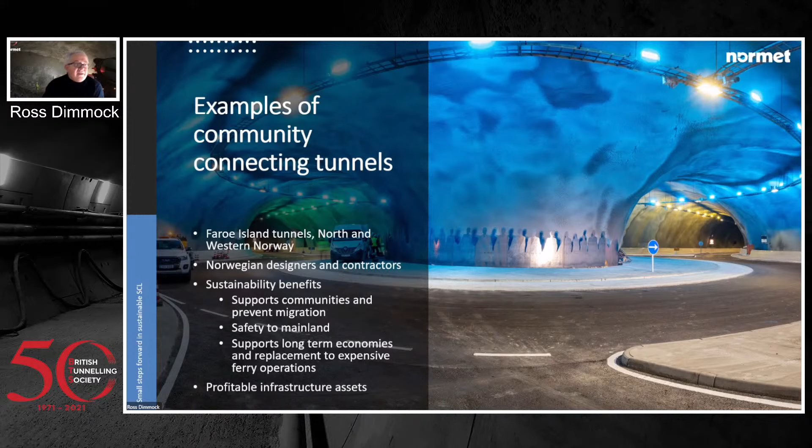Interestingly, these are Faroe Islanders. They've got 44 kilometres of existing tunnels built since the late 60s. They've got 2 more massive tunnels being completed next year, and 30 kilometres more in planning, for just 50,000 inhabitants. Don't tell the people in the Shetland Islands, of which there are 22,000 - they'll want half of this in tunnelling as well.

I know Andy Sloan from COWI was discussing this with me before, and I think there's interest in looking at these connecting tunnels - they can be very low cost sprayed concrete structures that, as long as you put your windscreen wipers on, you're okay if there's a few drips here and there. You can produce quite efficient tunnels, and these guys have proven it, both in Norway and in the Faroe Islands. So quite an interesting role for sprayed concrete tunneling.

So I'm coming to the end. This is the last but one slide, and it's really about getting things moving. What are we doing? We've got a lot of talk in the press, the media, the UN, politicians, COP26, and I'm not hearing too much really from the industry yet on this. I know there's been a few trials on sprayed concrete and other concrete being done, but I think we really need to start thinking more seriously about carbon reduction.

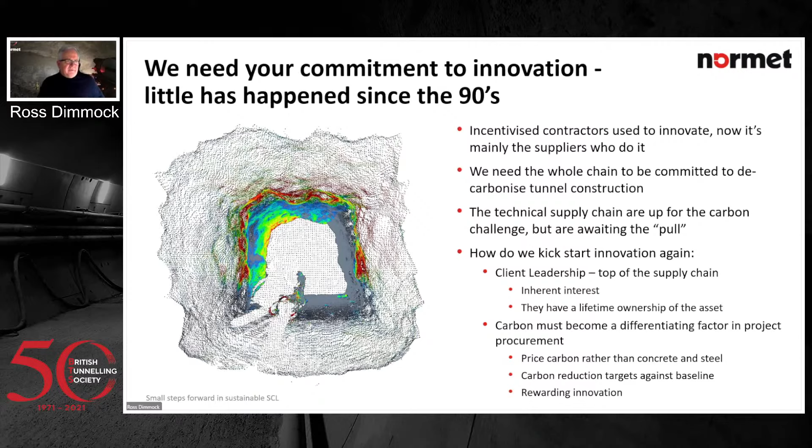I think in Norway, it's very much a carrot approach. For example, the government are actually incentivizing contractors with rebates for the seemingly high upfront costs on equipment, rebating them the difference between traditional diesel equipment and also on the materials.

So that sort of difference between the low carbon cost and the standard material or equipment, they're actually giving 40-50% rebates on that. So I think that's what we really need to think about: do we beat people into low carbon tunneling, or do we pull them in and encourage them?

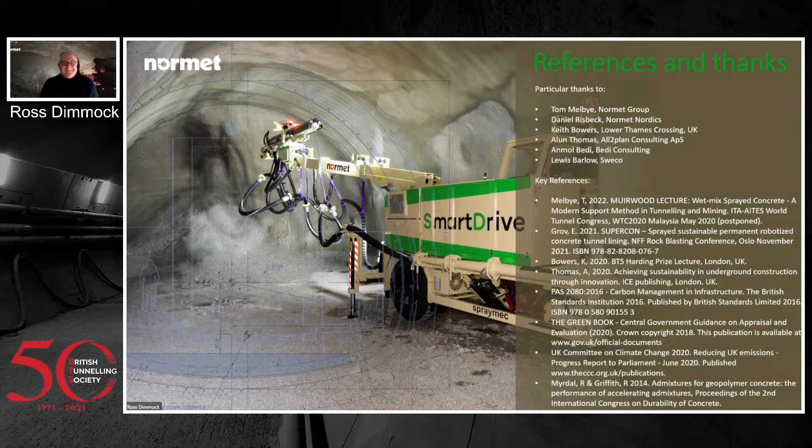Well, thank you, Ross. I think that has been an enormously inspiring call to arms. And I've been given the encouraging note that you've actually got lots of questions. So I hope, like myself, you've really been inspired and given a great start to 2022. I think there's been a number of thought-provoking things there.